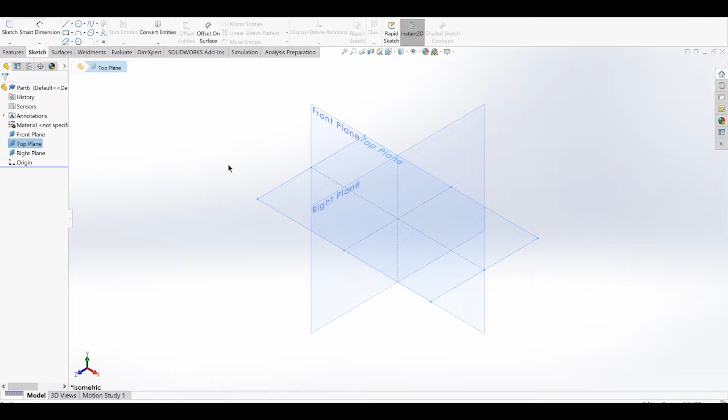Before you sketch in SolidWorks, you need to select a plane or a face that you would like to sketch on. I'm going to select the top plane. It's good practice to look at the plane you're sketching on head on so that your perspective is not skewed, so I'm going to go to the top view.

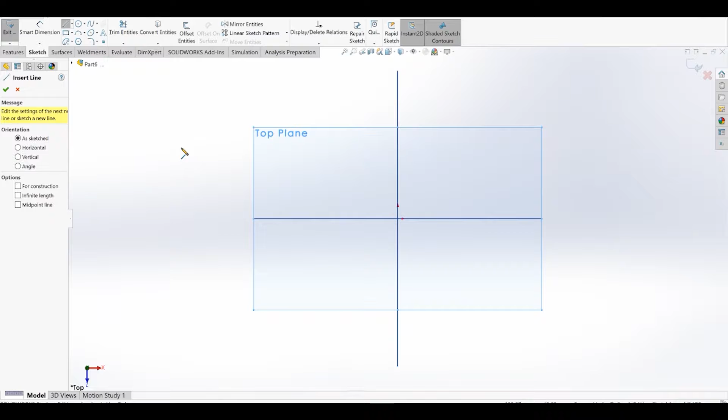Make sure that your sketch tab is selected. We're going to start off with the simplest tool in SolidWorks, and that's the line tool. When we click on that and are ready to go, we can see that our cursor changes to this pencil icon. To start drawing a line, simply click and then move your mouse, and you can control the size and the direction of your line.

Click again to end your line segment. You can add line segments to one another, and when your line is perfectly horizontal like this, or perfectly vertical like this, SolidWorks will notify you with a little yellow box next to your pencil icon.

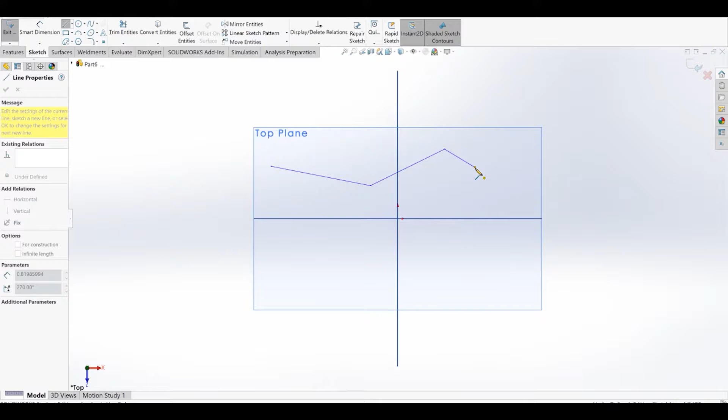You can draw more than just lines with the line tool. In fact, if you hover over the end point of the last line segment you created, you can draw an arc. And at the end point of that arc, you can continue with a regular line or another arc, like so.

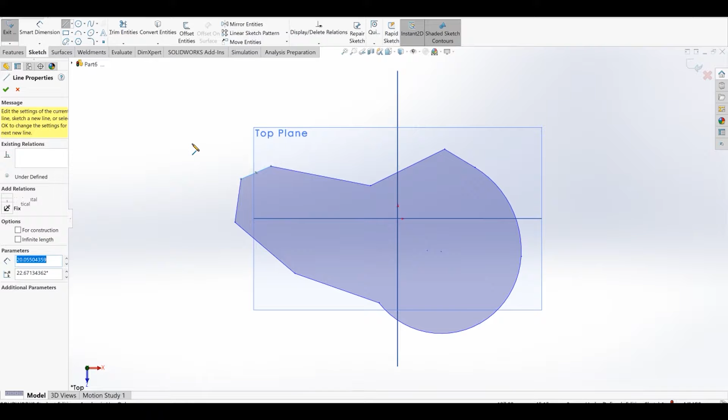I'm going to finish off this shape with some regular lines. Now as you can see, when you have a fully enclosed shape in SolidWorks, the inside of it will be highlighted a dark blue color.

I don't want to sketch any more lines, so I can go over to this left menu and press OK and then OK again. Alternatively, I could have hit escape.

Now I want you to notice in this menu that next to our sketch, we have this traffic light icon. That basically tells us that we are currently editing this sketch. Everything that we do applies only to this sketch. And if we wanted to exit this sketch, we would have had to hit this exit sketch button here or press Ctrl B.

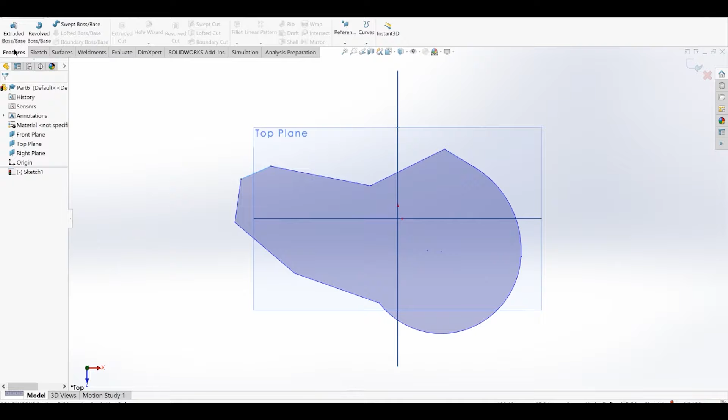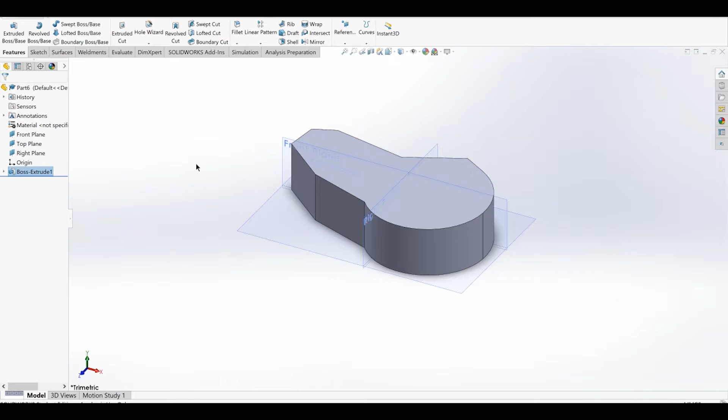Before I move on and show you some more sketch tools, I'm going to show you the most common feature tool in SolidWorks. Go to your Features tab and hit on Extruded Boss/Base. By default, we have the depth set to 10 millimeters. We're going to change it to 40 millimeters and then press Enter. You can hit OK to confirm that. And as you can see, from that irregular 2D shape we drew, we have created our first 3D object.

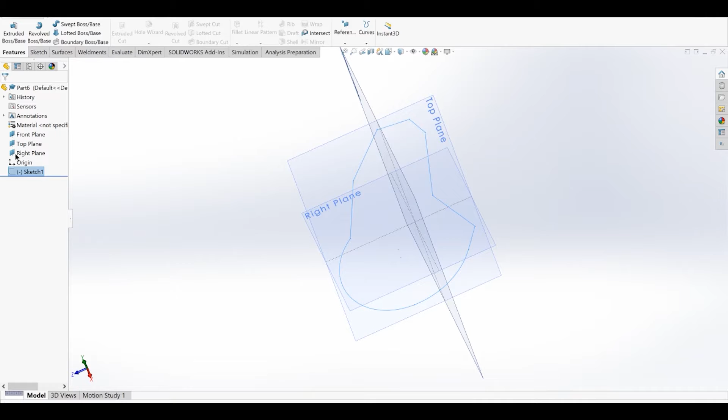Now this object is only going to get in our way for now, so I'm going to delete it. If we look at this menu where we see sketch 1 is, the traffic light is not next to it, meaning that we're not currently editing it. So if we want to edit it, we have to right click and then select Edit Sketch. I'm going to go back to my top view.

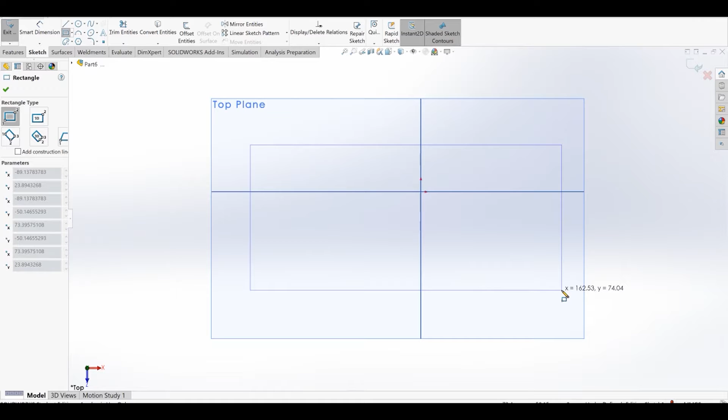Before I show you a few other tools, I'm going to delete this. Now we'll try out the rectangle tool, specifically the corner rectangle tool. There are several ways you can create a rectangle, but we're only going to stick to the default for right now. Click to start your rectangle and then move your mouse to control the width and the length of the rectangle. After you make your rectangle, you can change all of its parameters in this left menu here, but we're just going to leave it as is for now.

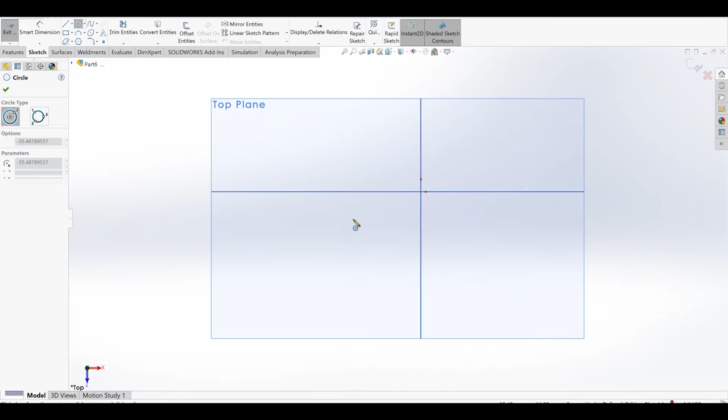Next, I'm going to show you the circle tool. So let's get this rectangle out of our way. It's right next to our line tool, and the first point we make, when we click, it's going to be the center point of our circle. And as we drag our mouse out, we're defining the radius of our circle. When we're done, we can change parameters over here in this dialog box.

So if I wanted my circle to be located at the origin, that is, if the center point is at the origin, I can change the x coordinate of its center point to 0 and the y coordinate of its center point to 0. And if I wanted a circle with a radius of exactly 100 millimeters, I can simply type 100 in here and we're done. So I'm going to hit OK.

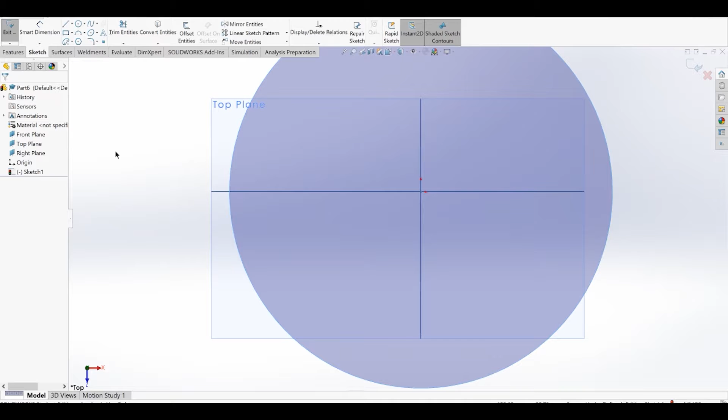Now I want to create another sketch on a different plane. So like I said earlier, I'm either going to hit the exit sketch button or press Ctrl B. You can see when we exit our sketches that our shapes turn to this gray color.

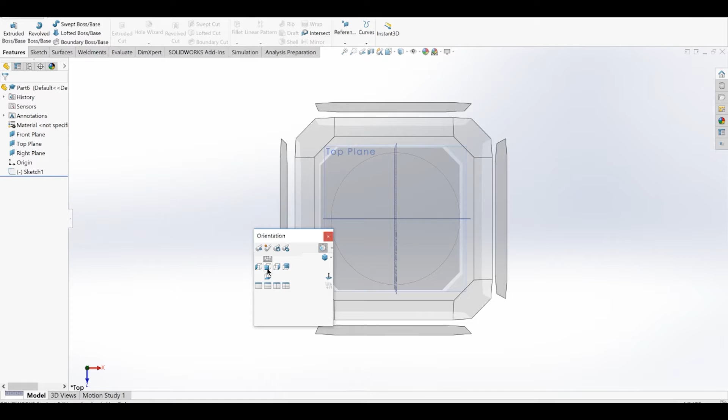So I'm going to choose to sketch on the front plane now. I'm going to select this front plane and go back to my sketch tab.

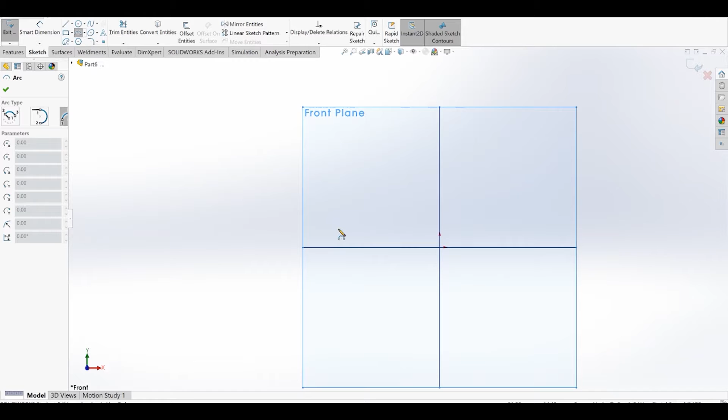The next tool I'm going to show you is the arc tool. There are several ways you can draw the arc, but we're going to stick to the 3-point arc. The first point you draw is the first endpoint on your arc, the second point you make is the second endpoint, and the third point determines the radius of this arc, so it determines how shallow or how exaggerated the arc is. I can leave it like that and then hit OK.

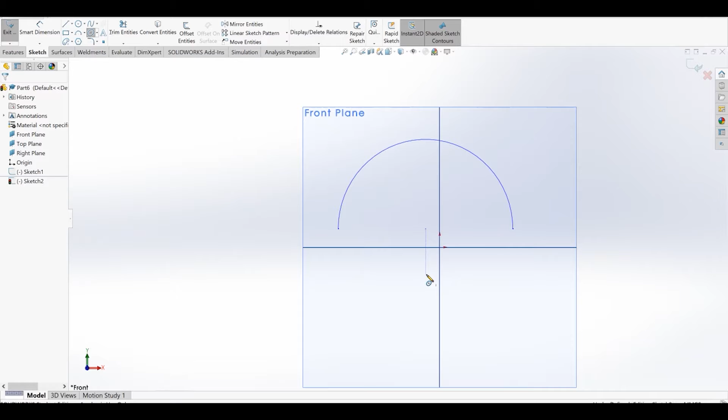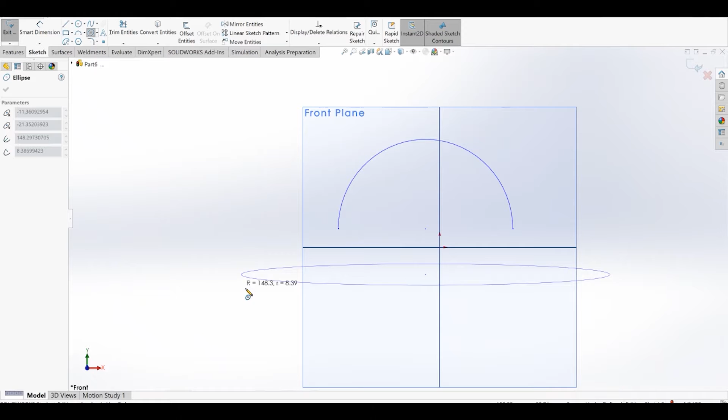Next, I'm going to show you the ellipse tool. There are many different ellipses you can create, but we're going to stick with the standard ellipse. Just like with the circle, the first point you make defines the center point of your ellipse. As you drag your mouse out, you determine not only the size but the direction of your major radius. If I have my line completely horizontal like this, the minor radius will expand perpendicular to that, so it will expand vertically. It really does matter how you orient that first line. So I'm going to leave it like this, and again I can hit OK or press Escape.

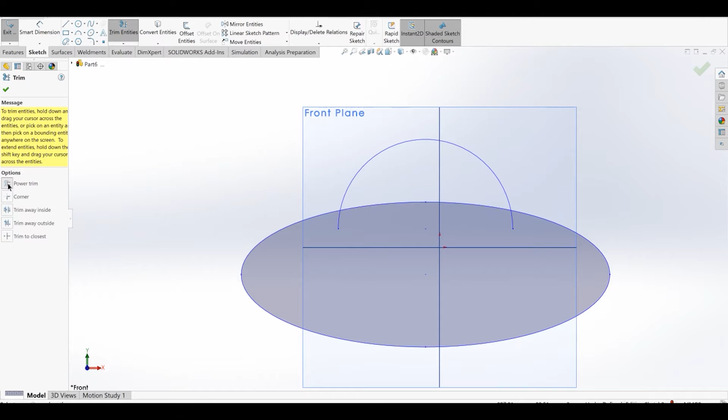This is a good opportunity to show you one of the most useful tools in the Sketch tab, the Trim tool. To access it, click on Trim Entities, and by default the Power Trim option will be selected. What this allows us to do is subtract shapes from one another.

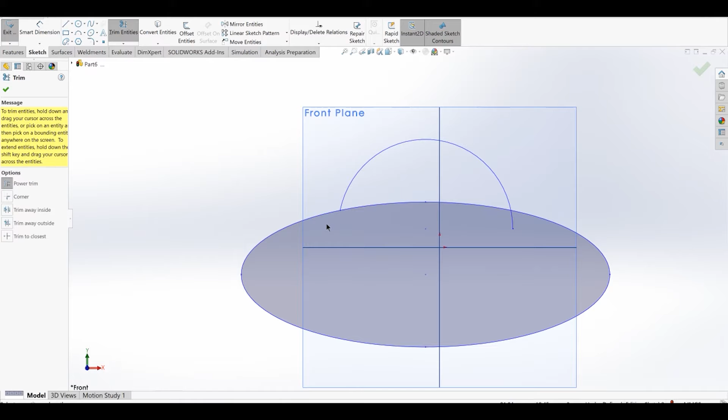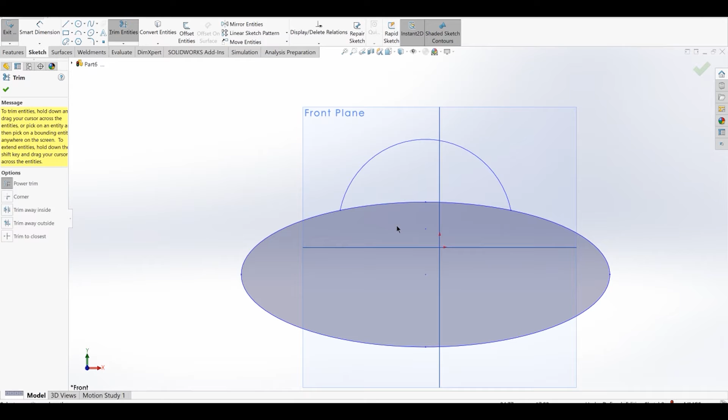For instance, if I wanted to get rid of this portion of the first arc I drew that's intersecting this oval I created, I can simply click and hold my mouse and drag to get rid of that part. I can do the same thing here. And if I only wanted the outer edges of this to define a fully enclosed shape, I can get rid of this portion of my oval. Again, I simply click and hold and drag, and now I have this UFO saucer shape. I can hit OK in this menu here, and we'd be good to go.

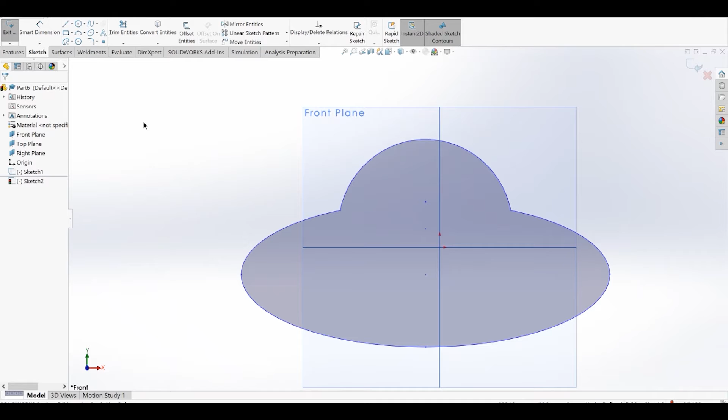Now I'm going to switch to the right plane to create another sketch. So I want to either hit Ctrl B or exit sketch. Now note that when you're creating a new sketch, you don't have to sketch on a new plane—I'm just doing it to make the illustration easier.

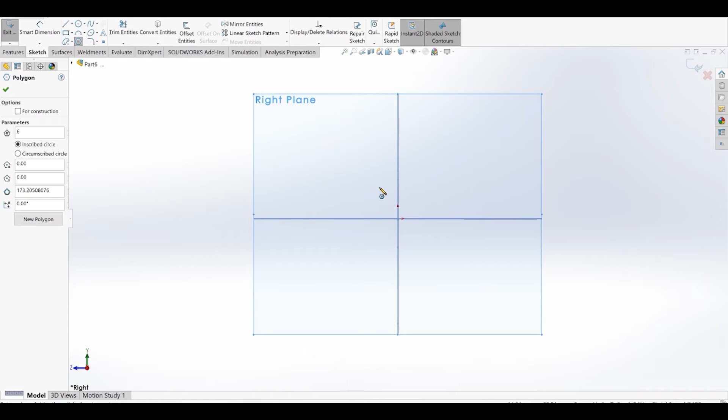So I'm going to click on my right plane, and the next tool I'm going to show you is the Polygon tool. Just like with the circle, the first point you make will determine the center of your polygon, and as you drag your mouse out, you determine the size and orientation of your polygon. So I'm going to leave it like this.

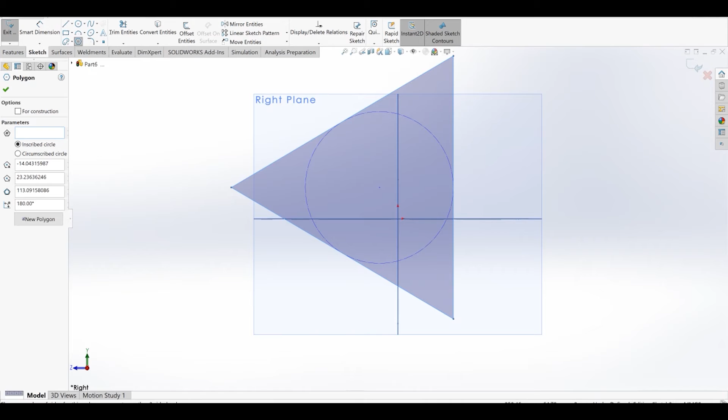By default, it's going to be set to a hexagon, but of course you could change the number of sides it has. You can make it a 3-sided polygon, which is a triangle, or an 8-sided polygon, an octagon. With the rest of these boxes here, you can change the orientation, the size, and the location of the center point of this polygon. So I'm going to hit OK.

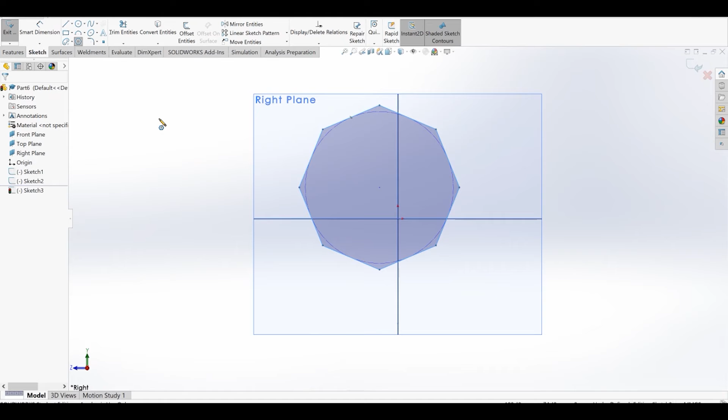The next thing I'm going to show you is the spline tool. So we're going to delete this polygon and go up to this curve right next to our circle tool that says spline. Again, we have several types of splines: the regular spline, the style spline, and the equation-driven curve. We're going to stick with the regular spline for right now, and in later tutorials we're going to cover how to use the style spline.

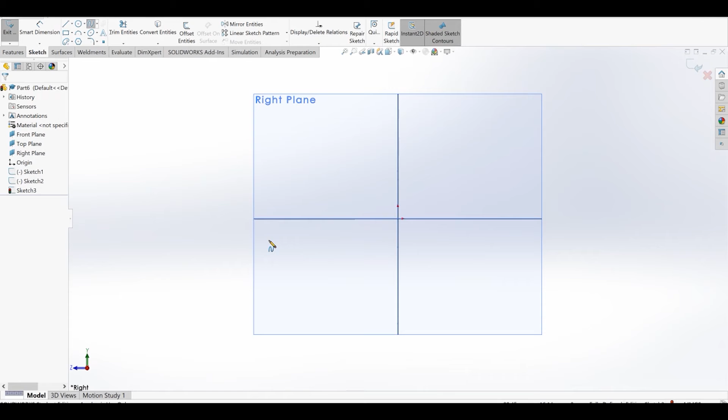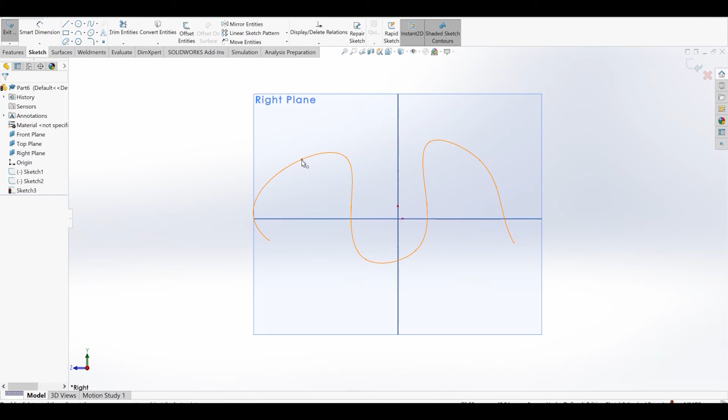When you use a spline, you're basically creating a bunch of points that a specific curve will intersect. As you can see, it's a very flexible tool, and you can create all types of shapes just by defining different points on a spline. If you want to stop drawing your spline, you can simply hit escape. You can control the points on these splines just by clicking and dragging. So it offers a lot of flexibility in terms of creating irregular shapes that our polygons and arcs simply cannot do. I'm going to hit OK because I'm comfortable with the shape of this spline.

The last sketch tool I'm going to show you in this tutorial is the point. This is literally just for creating a single point as a sketch. It has a few uses, but I don't think you'll be using it much—but I'm going to show it to you anyway. You simply just click, and there it is. That's all there is to it. And you can hit OK.

Now in the next video, I'm going to be showing you sketch relations, smart dimensioning, and all that stuff. So see you next time.